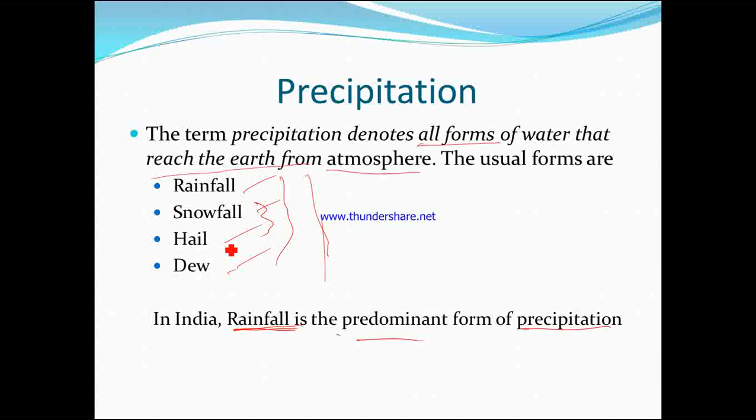There are several types of forms. In dew as well we are getting water, but obviously that is not rainfall. Snowfall and hail are different. So various forms of water, if falling and reaching the earth's surface from the atmosphere, will be considered precipitation. But in India, rainfall is predominant as precipitation because we don't have much snowfall overall in India, and only a small amount of hail and dew. So majorly we are having rainfall, right?

So what forms can there be? Already told in the last slide. First of all, we can have rain. What will be considered rain? That is the precipitation in the form of water, with drop size ranging from 0.5 millimeter to 6 millimeter.

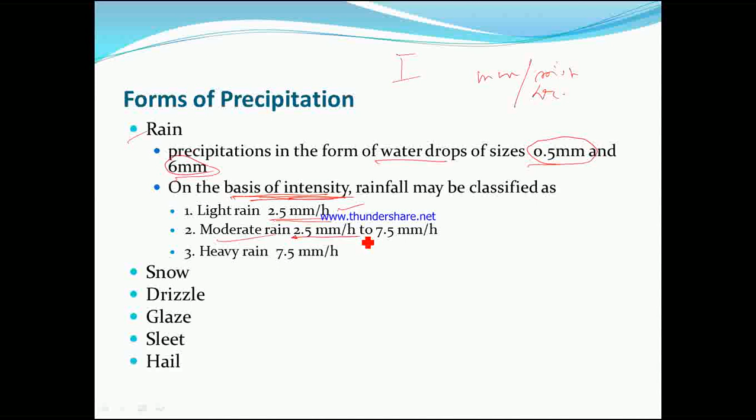Now on the basis of intensity - intensity is the amount of water per unit time, considered in terms of depth, say millimeter, per unit time, either per minute or per hour - that is the intensity. So on this basis there may be light rainfall, where intensity is up to 2.5 millimeter per hour; moderate rainfall, where intensity is 2.5 to 7.5 millimeter per hour; and heavy rainfall, where intensity is 7.5 millimeter per hour or more.

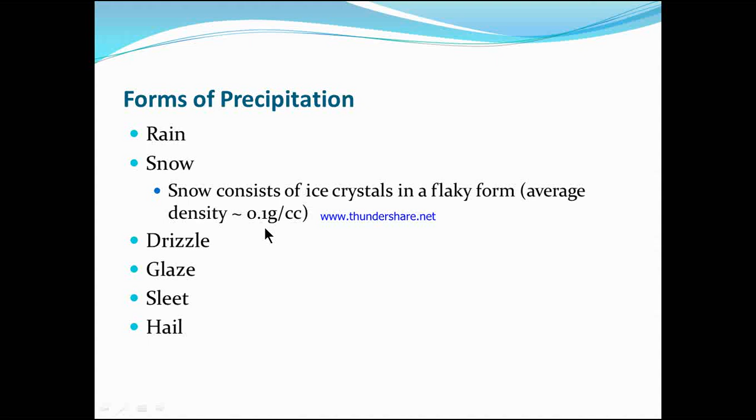Next we are having snow, which is crystallized ice in flaky form, with a density of almost 0.1 gram per cc.

Drizzle is when the size of the droplets is lesser than 0.5 millimeter. So if it is more than 0.5 millimeter, it is called rain, and if lesser than 0.5 millimeter, it is called drizzle. The intensity should be greater than 1 millimeter per hour.

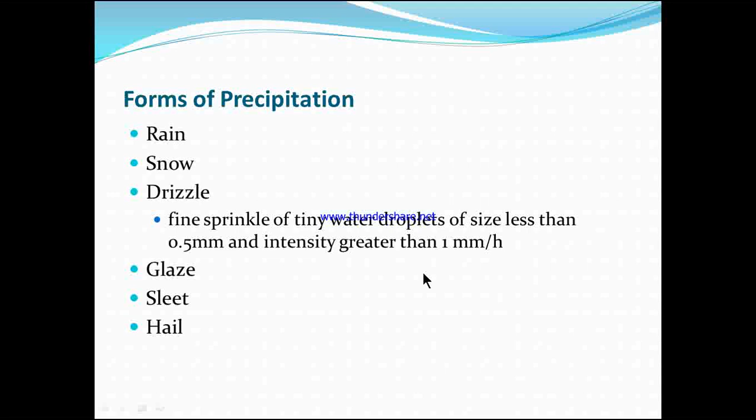Next we are having glaze, where rain or drizzle may come into contact with cold ground, and due to that, an ice coating can be created or situated outside the droplets of water.

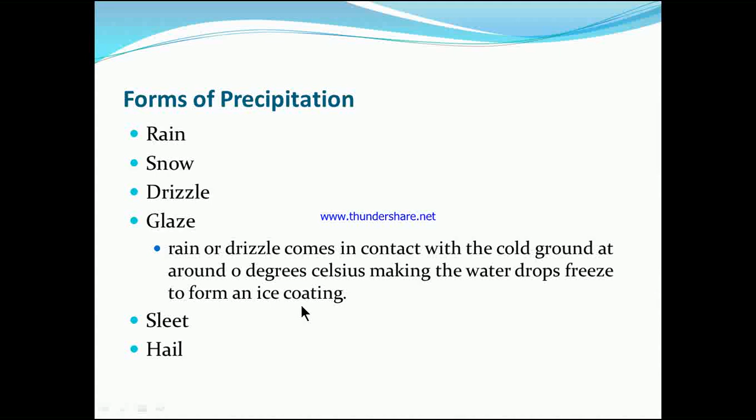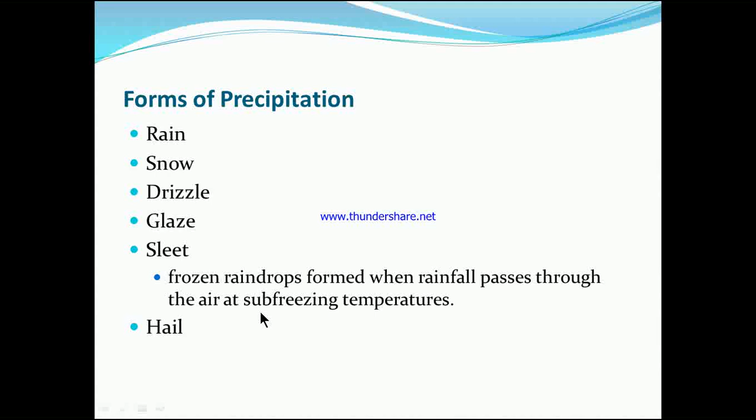That will be called glaze, where sleet is the frozen raindrops. How is it frozen? When passing through air with sub-freezing temperature, it will eventually be frozen, and those raindrops we consider as sleet.

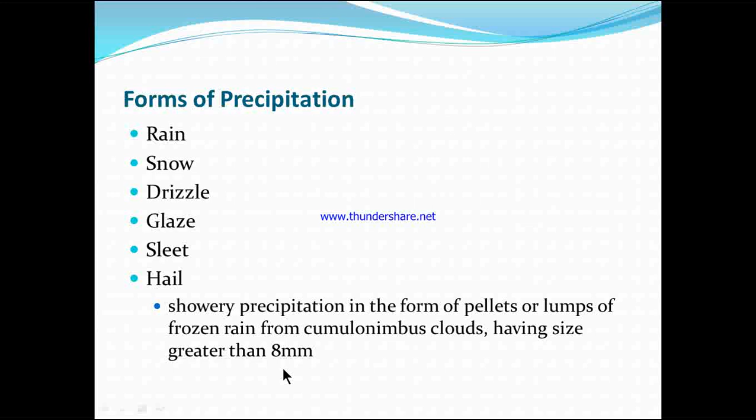Hail is a showery form of precipitation, where lumps of frozen rain come into the picture, having a size greater than 8 millimeter. Clear? So those are the types of precipitation.

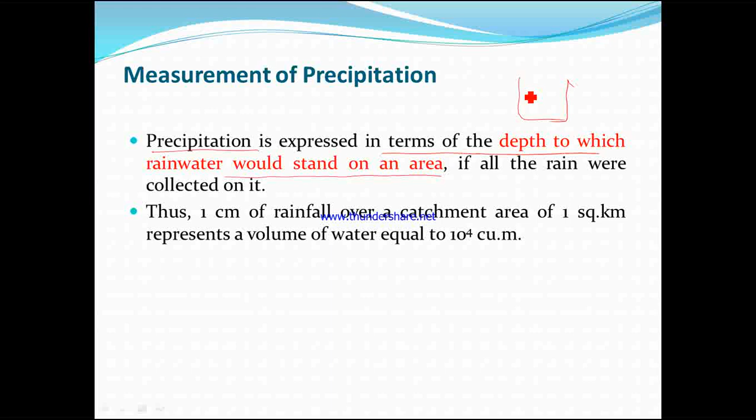Now, how can we measure the precipitation? I've already told you that we generally measure precipitation in terms of depth. Precipitation is expressed in terms of the depth to which rainwater would stand on an area. If you store the water in a particular area, the depth by which it stands, this will be the rainfall amount or precipitation amount.

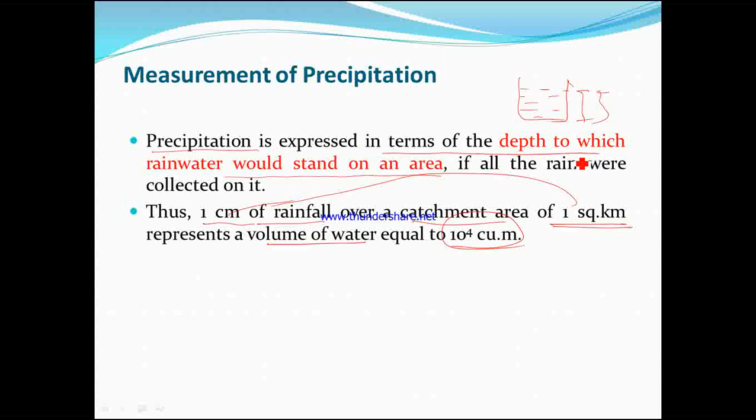Now why do we do that? Because the catchment area will be known to you. So if you multiply the depth with the catchment area, you get the volume of rainfall. Thus 1 centimeter of rainfall over a catchment area of 1 square kilometer gives a total volume of water of 10 to the power 4 cubic meter.

Now what is the instrument by which we can find out the amount of rainfall or the depth of rainfall? The instrument is called Raingauge. It consists of a cylindrical vessel which is kept open to collect rain - a vessel-like structure where the top portion is open.

Now whenever you are installing this rain gauge at a particular point, which is called a station, we need to look for some sort of settings so that we can get accurate data. What will those things be? Those are the safety measures, we can say.

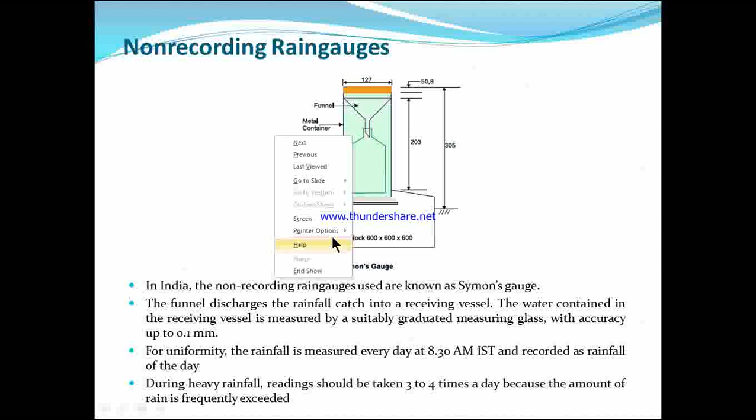Okay. So if you consider the non-recording type, we have this one, that is called the Symon's gauge. This is one typical figure of the Symon's gauge with the exact dimensions. Those dimensions are fixed. You can see by the figure that it's a simple form of instrument. It is nothing but a vessel catching the rainfall, standing in a particular area, so that we can measure the height.

So this funnel will collect the rainfall, and eventually the water will go to the vessel, and we can transfer it into measuring tubes, so that we can find out the amount or the height of precipitation. So this is non-recording type, because you have to measure it. You have to come into the field, collect the water from the vessel, and see the amount of water in the measuring glass.

So every day at 8:30 AM Indian Standard Time, generally it is recorded, and during heavy rainfall, the reading should be taken 3 to 4 times a day. These are the non-recording type rain gauges. In the case of recording type, there are 3 major recording type rain gauges, that is tipping bucket type, weighing bucket type, and natural siphon type.

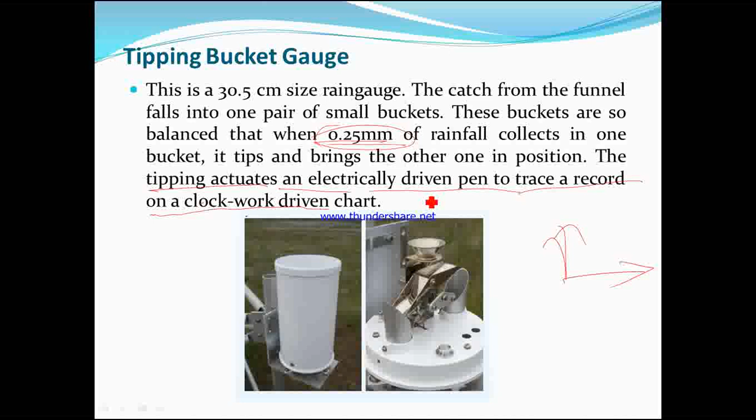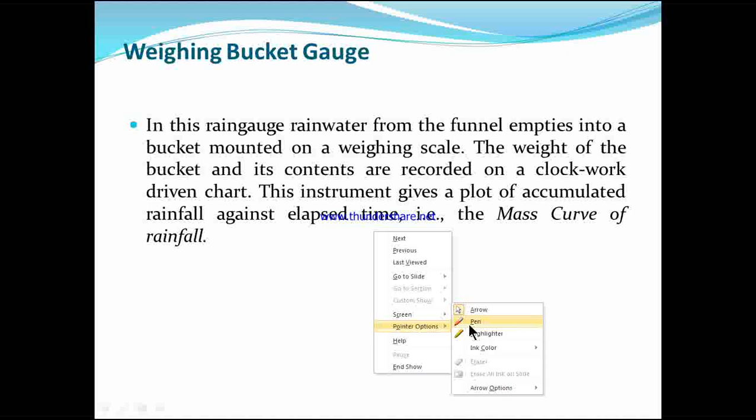So let us see first of all the theory, then we will explain in the image. In this rain gauge, the rain is collected by the funnel and it empties the water in the bucket, which is situated over a weighing scale. Now what will happen if rainfall is there? The weight of the bucket will be higher. That weight can be recorded, and that weight indicates the weight of the bucket and the content of the bucket, and that can be recorded in a clockwork driven chart.

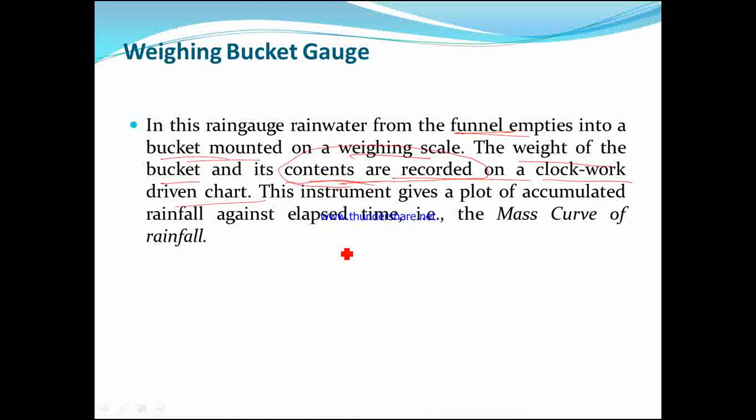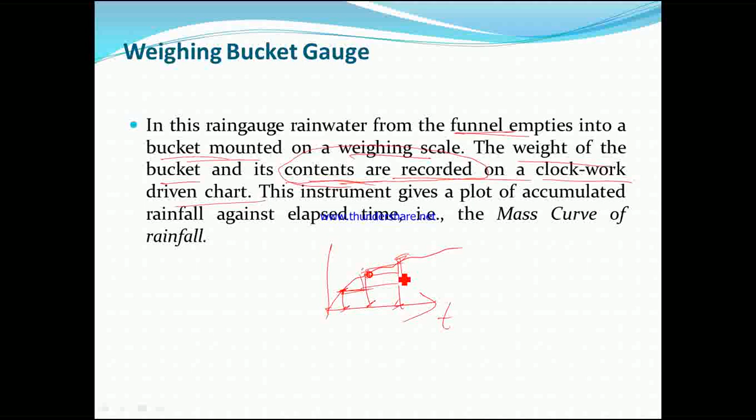So basically, with respect to the time, it is giving the cumulative amount of rainfall, because you are not emptying the vessel or bucket. So at a certain time, what is the weight? At a certain time, what is the weight? Because the initial water was not emptied, obviously this will give you the cumulative values.

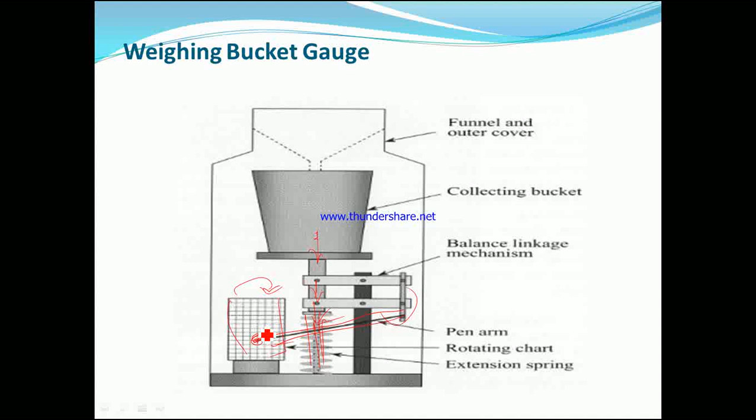Let us see the theory. This type of gauge is also known as float type gauge. Here the rainfall collected via the funnel shaped collector is led into the float chamber, causing a float to rise. Because the float is rising, a pen attached to the float will record the data in the clockwork driven chart.

Now, why is it called a natural siphon type gauge or siphon type gauge? Because a siphon mechanism is there for emptying the water. What will happen if the collector is full? Here a siphon mechanism is there. This mechanism will empty the water from the chamber, right?

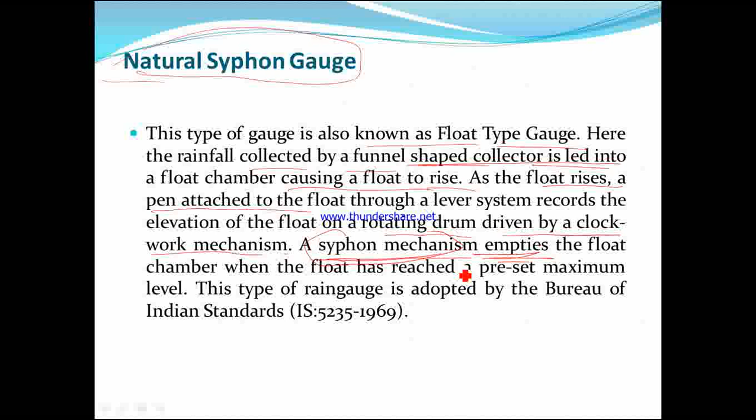You can see this one. I've already told you this rainwater will be collected, and this will empty the water in this chamber. This chamber consists of a float. So with the rise in water level, this float will be rising, and with the float, the pen is connected to this clockwork driven chart, which will be rotating with time, and it will indicate the amount of precipitation with respect to time.

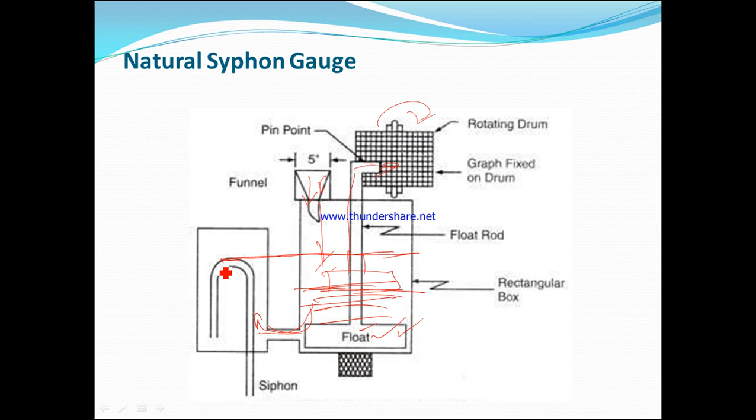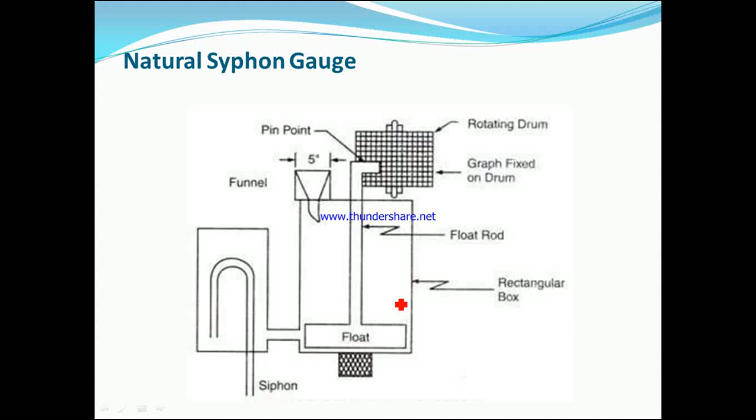And whenever you are having this height, this is also filling this chamber, and if the height is this one, a siphon mechanism will empty the chamber, right? So those are the types of rain gauges.

Now we will see the rain gauge network. What is a rain gauge network? Let us say, suppose we are having a catchment area which is

Suppose you are having one catchment which has an area. Obviously this area will be large, and somewhere here you are having one rain gauge station. On the basis of the recording by this rain gauge, can you say that this was the amount of rainfall over the catchment area?

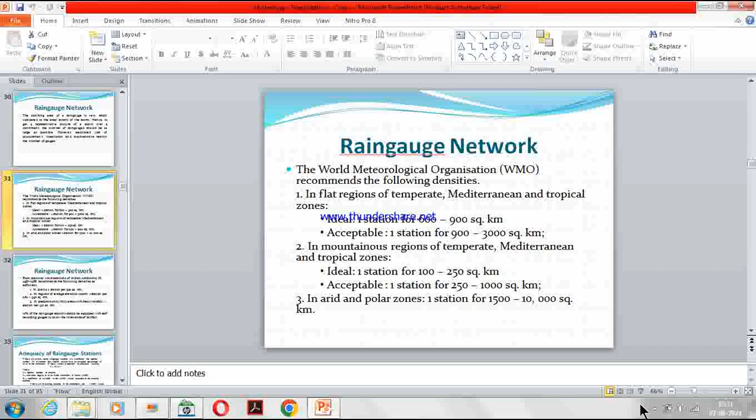Can you say that? No, we cannot, right? Because it's just a tiny portion it is covering with respect to the catchment area. So to know the actual situation, obviously you will not get the actual, but the accuracy you will get.

To increase the accuracy, what you can do, you can install more number of rain gauge stations in various places. If the number of rain gauges is higher, then obviously the accuracy will be higher. So this thing is called the network, or rain gauge network.

So the catchment area of a rain gauge is very small compared to the areal extent of the storm. Hence, to get a representative picture of a storm over a catchment, the number of rain gauges should be as large as possible. However, obviously, the cost associated with installation, maintenance, various sorts of problems are there, so there will be some limitations. So that is called the rain gauge network.

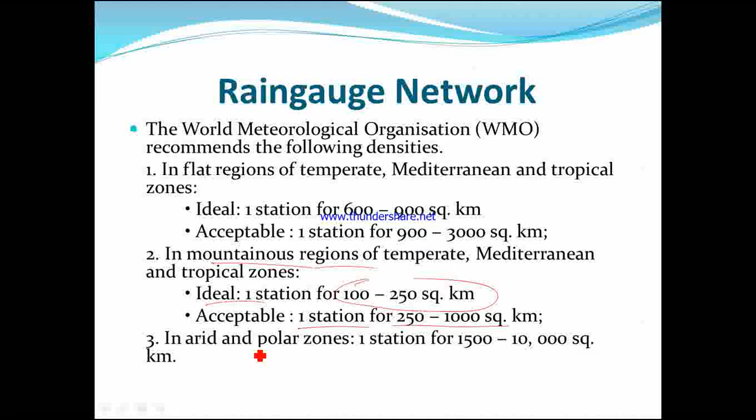So if your catchment area is suppose around 1600 kilometers square, then you have to install 2 stations ideally. But one station for 900 to 3000 square kilometers is also acceptable, just acceptable. Likewise, for mountainous region, we are having one station per 100 to 250 square kilometers. Acceptable can be one station in 250 to 1000 square kilometers, and in arid and polar zones, the station numbers would be this one, right?

Next, we are having the guidelines given by the Indian standard IS 4987 1968. According to this IS code, there should be one station per 520 square kilometers in plain region, one station per 260 to 390 square kilometers in regions having average elevation of 1000 meters, and one station per 130 square kilometers if it is predominantly hilly, right? Out of which 10% of the rain gauge stations should be equipped with self-recording rain gauges. Those are the guidelines given by the Indian standard.

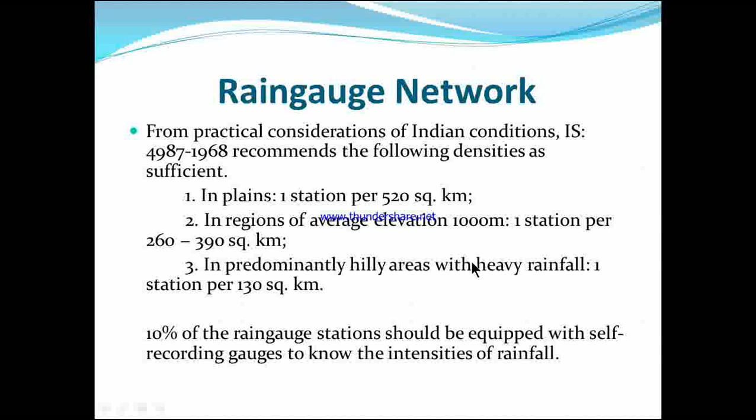Now let us look at the adequacy of rain gauge stations. What will be the optimal number of rain gauge stations in a particular area with respect to the allowable degree of error? Obviously, I have already told you, if the number of rain gauge stations is higher, the error will be less. So what is the allowable error you are considering? If the allowable error is lesser, the number of stations should be higher, right?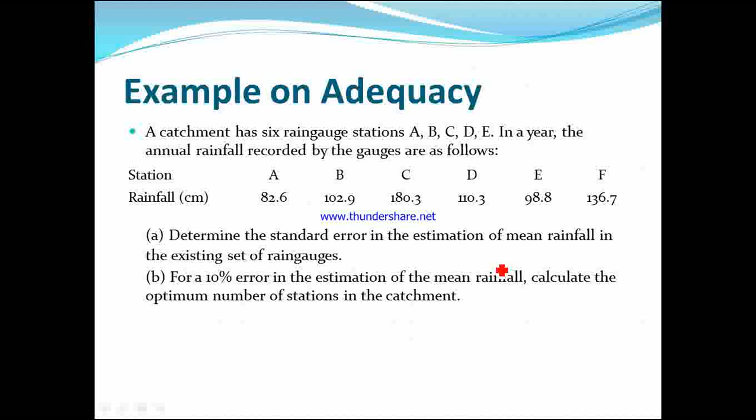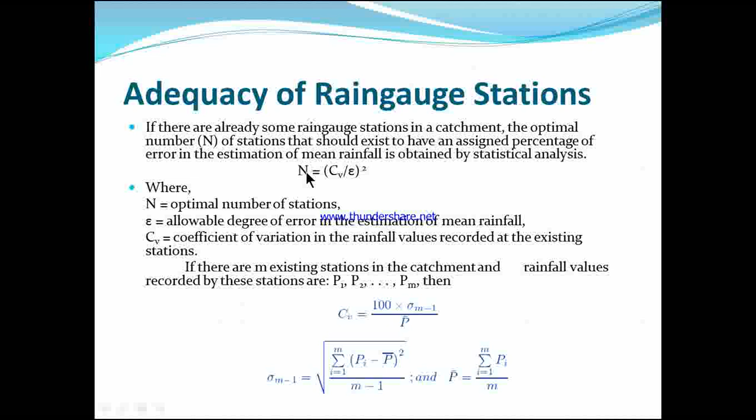So what is the error right now? And secondly, they have said, if you allow 10% of error, then what should be the optimum number of stations in the catchment area? So first of all, we need to find out the current error. To find out the current error, we use this formula, but instead of n, as we are not considering the optimal number of rain gauge stations, we have the number of rain gauge stations as m, and we find out epsilon. So n will be equal to m. First we need CV, to find CV we need sigma m minus 1, and to find sigma m minus 1 we need P bar.

So the number of rain gauge stations is m. After calculation, P bar is this one, and P bar is nothing but summation of Pi, where i varies from 1 to 6, divided by 6: P1 through P6 summed, divided by 6. The formula of sigma m minus 1 is given: root over summation of Pi minus P bar whole square divided by m minus 1. Here again m is 6. After finding out the standard deviation, you can find out the CV, coefficient of variation, by this formula. So first we need the error associated with the current number of rain gauge stations.

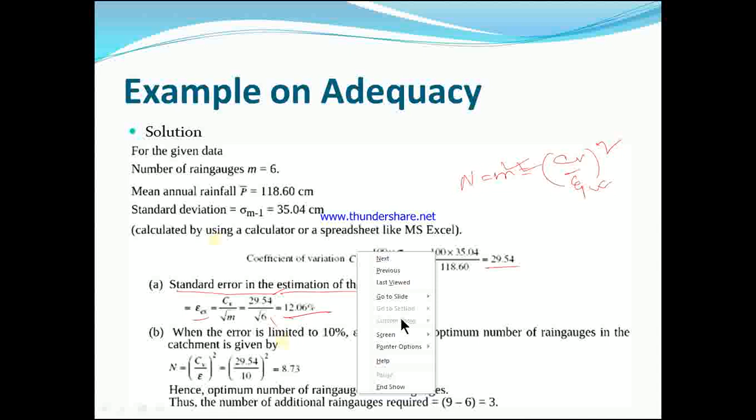The formula will be the same. So basically n, as here n equals m, is CV divided by epsilon whole square. Now this is known, this you need to find out. So epsilon will be equal to CV divided by root m. CV you have already got, 6 is known. The associated error right now is 12.06%. Now they have asked another thing: if you allow 10% error, what will be the optimum number of rain gauge stations?

The formula will be the same, n equals CV divided by epsilon whole square. Here n is unknown, epsilon is known, that is 10, and CV will be the same. You can find out the optimum number of stations. Now the number of stations should be an integer value, right? It will not be decimal. So this will be almost equal to 9. 9 rain gauge stations is the optimum. Already 6 were there, so 9 minus 6, that is 3 additional rain gauge stations you need to install. This is about the rain gauge network and the optimal number of rain gauge stations in a particular area.